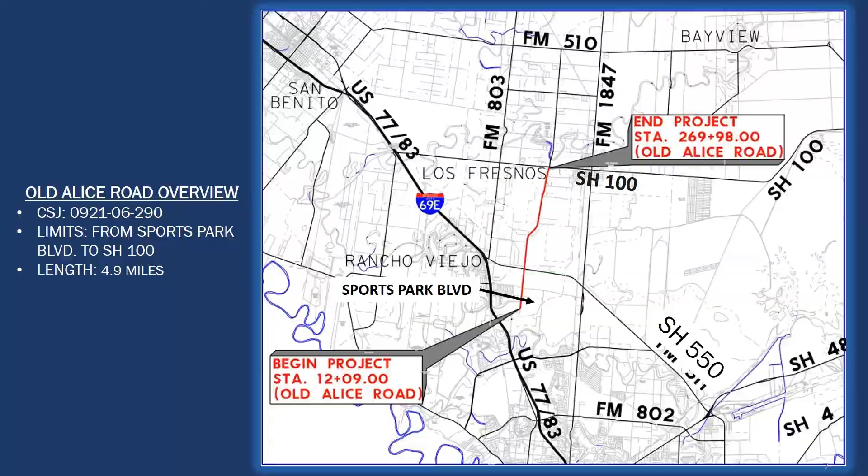The project is needed because Old Alice Road does not meet current TxDOT design standards. The existing roadway is at traffic capacity and is experiencing increased traffic congestion. Reduced mobility has decreased automobile and pedestrian safety and has inadequate drainage.

Traffic is expected to increase from 16,900 to 24,200 vehicles per day, a 43% increase. Portions of the road are impassable during rain events due to lack of pavement, causing a safety concern.

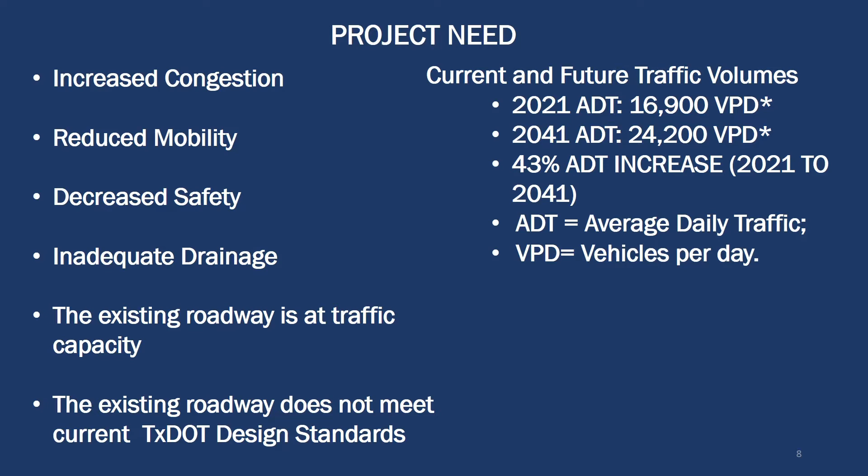The purpose of the proposed project is to meet the current TxDOT design standards, provide a roadway to meet the anticipated increase in traffic volumes, to reduce traffic congestion, to improve traffic and pedestrian mobility, to improve roadway drainage, and to improve community connectivity between Sports Park Boulevard and State Highway 100.

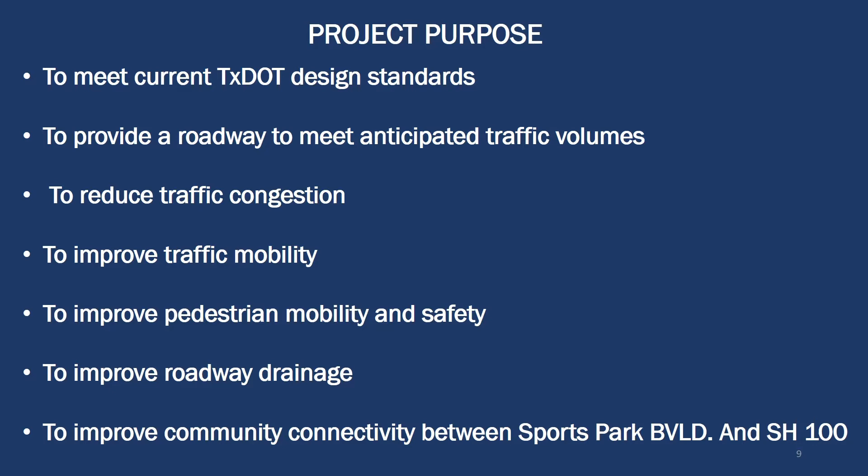As previously mentioned, Old Alice Road is a rural roadway consisting of a 2-lane roadway with no shoulders, and stormwater runoff is handled by parallel open graded ditches. The roadway also is not paved in some areas where the roadway is not striped to designate each travel lane, and during major rain events is unpassable.

The pictures presented depict the existing conditions of Old Alice Road. The first picture shows the existing roadway conditions from Sports Park Boulevard to State Highway 550. The roadway is a 2-lane asphalt paved roadway with no shoulders, and drainage is accomplished by open vegetated ditches that are parallel to Old Alice Road.

The second picture depicts the existing condition of Old Alice Road from State Highway 550 to 1.65 miles north of State Highway 550. The roadway is a gravel dirt roadway consisting of an unmarked roadway with no designated travel lanes. Open graded ditches, which are parallel to Old Alice Road, provide drainage for the roadway.

The third picture depicts the existing conditions of Old Alice Road from 1.65 miles north of State Highway 550 to State Highway 100. This section of roadway consists of a 2-lane narrow roadway with no shoulders, and drainage is provided by parallel open graded drainage ditches.

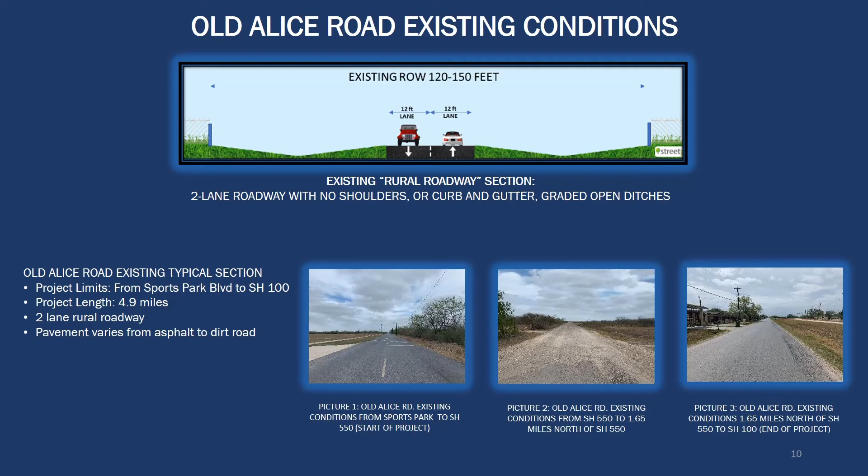The roadway will be reconstructed and widened to provide for an urban roadway typical section. This upgrade would consist of 4 12-foot wide travel lanes, a 16-foot wide center left turn lane, and 10-foot wide shoulders. The roadway would have curb and gutter stormwater system to accommodate stormwater. Additionally, sidewalks will be placed parallel to the road on both sides for pedestrians.

Since the existing right-of-way width varies from 120 feet to 150 feet throughout the project, no right-of-way acquisition will be required on this project.

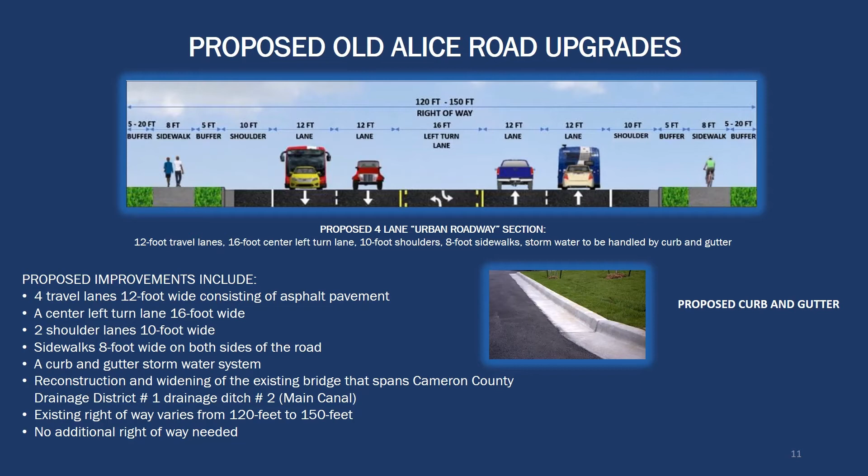For this presentation, the following slides will depict the roadway schematic in sections due to the length of the project roadway schematic. The schematic will also be posted on the virtual public meeting website so the public can view the schematic better and they can zoom into areas of interest.

This slide consists of the section from Sports Park Boulevard to Naranjo Road. As shown on the schematic at the beginning of the project, there is going to be a 540-foot transition from a 2-lane existing roadway to our proposed 4-lane section. The picture provided at the bottom illustrates the existing conditions of Old Alice Road, which shows a 2-lane road with no curb and gutter system. As previously mentioned, no right-of-way acquisition will be required.

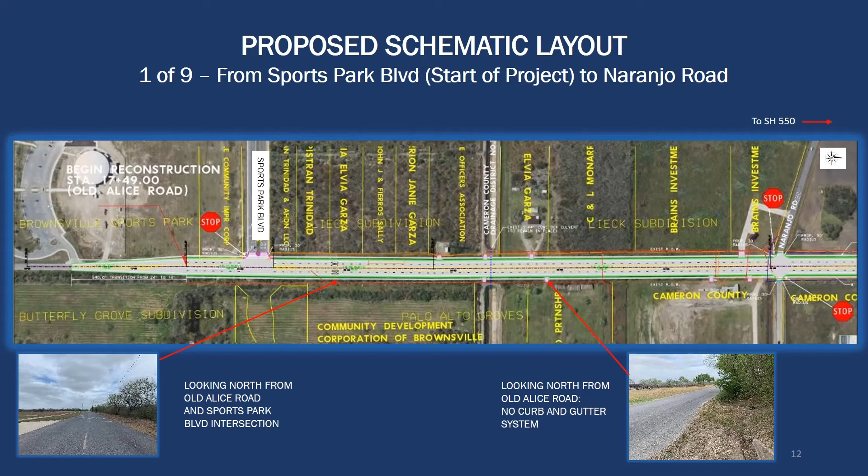The second section extends from Naranjo Road to State Highway 550. Pictures provided show existing conditions of the road underneath State Highway 550. The existing road below State Highway 550 has to be reconstructed in order to match the proposed typical section. The proposed improvements under State Highway 550 would not require any modifications to the existing overpass. A traffic signal is being proposed at the intersection of Old Alice and State Highway 550 frontage road.

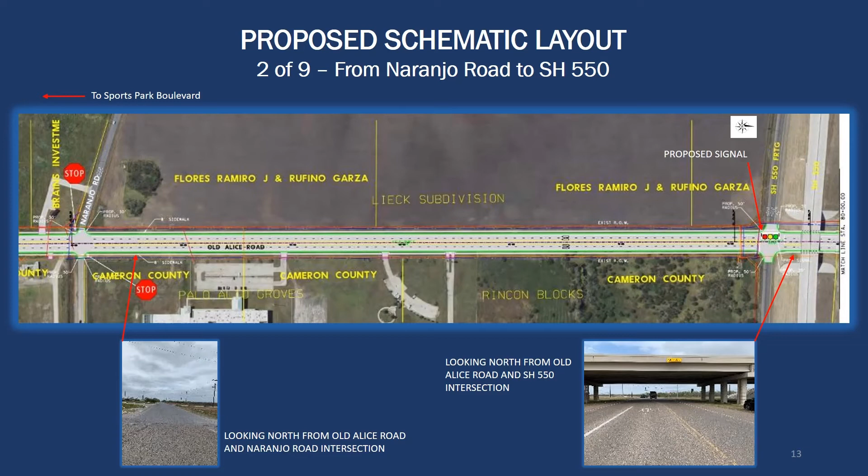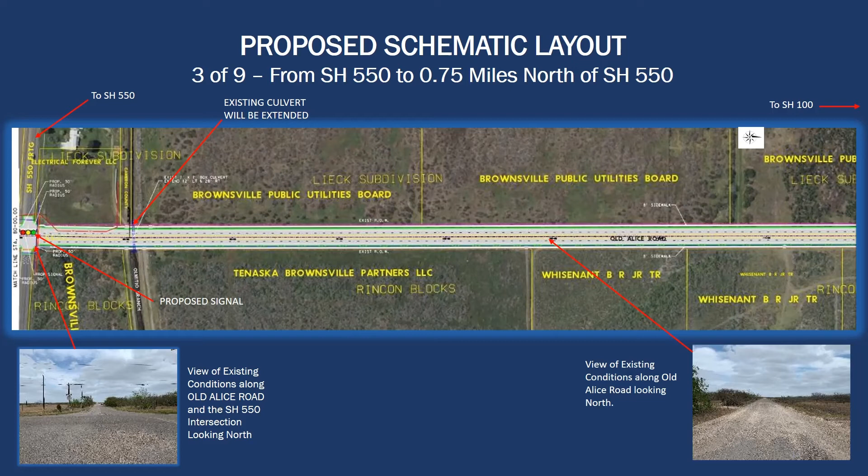The next schematic section is from 0.75 miles north of State Highway 550 to 1.25 miles north of State Highway 550, which has a major curve in the roadway. The road in this section also has no existing pavement, lacks signage, and has no pavement markings to guide drivers through the curve, which creates a hazard.

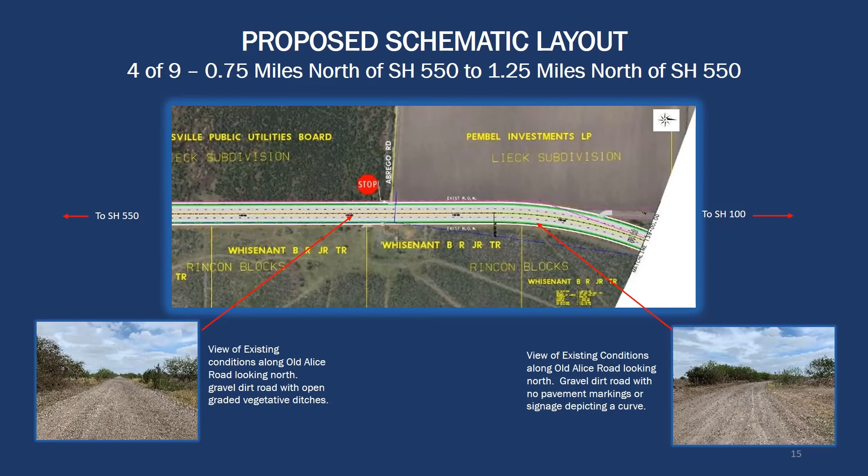The fifth section of the roadway schematic extends from 1.25 miles north of State Highway 550 to 1.65 miles north of State Highway 550, a distance of 0.4 miles. In order to maintain positive drainage, a new 138-foot-long culvert will be installed at the existing drainage ditch.

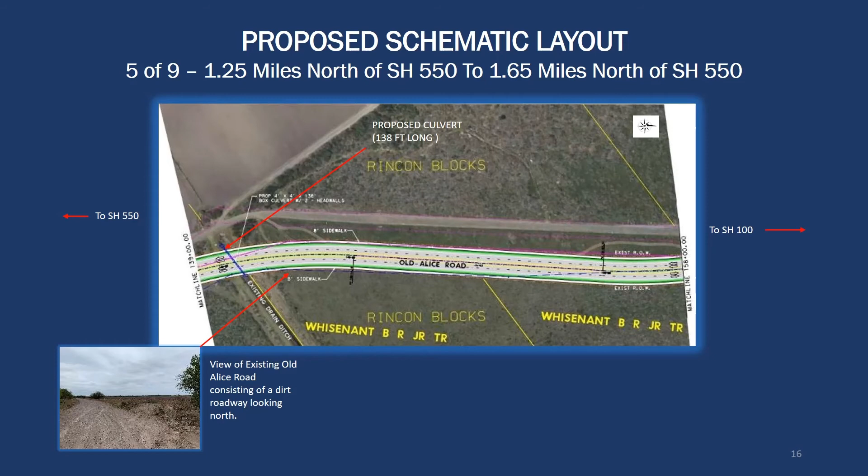The sixth roadway schematic section extends from 1.65 miles north of State Highway 550 to 2.32 miles north of State Highway 550. A portion of the improved roadway would run parallel to County Road 321 just north of the county roadway. As shown in the picture, the existing bridge width does not match the proposed roadway.

It will be removed and replaced with a new bridge to match the proposed roadway typical section. The bridge replacement is proposed to be constructed in phases so traffic flow is not interrupted. In order to provide access to Old Alice Road to County Road 321, an access road would be placed about 300 feet south of Lemon Drive.

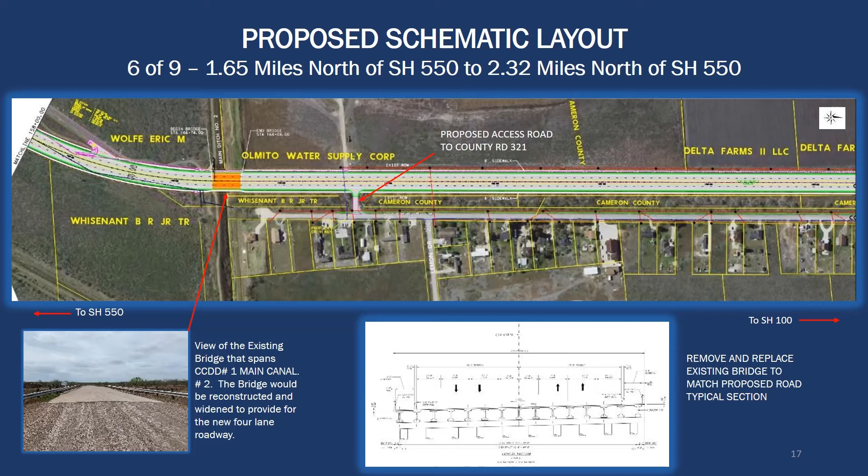The next schematic section extends from 2.32 miles north of State Highway 550 to 0.38 miles north of Papaya Drive. A new access road will be placed about 950 feet south of Papaya Drive to connect Old Alice Road to County Road 321. These access roads are crucial since both roads will no longer intersect with each other. This will be accomplished by removing a segment of County Road 321 as shown on the schematic. A cul-de-sac will be constructed to allow drivers to safely turn around.

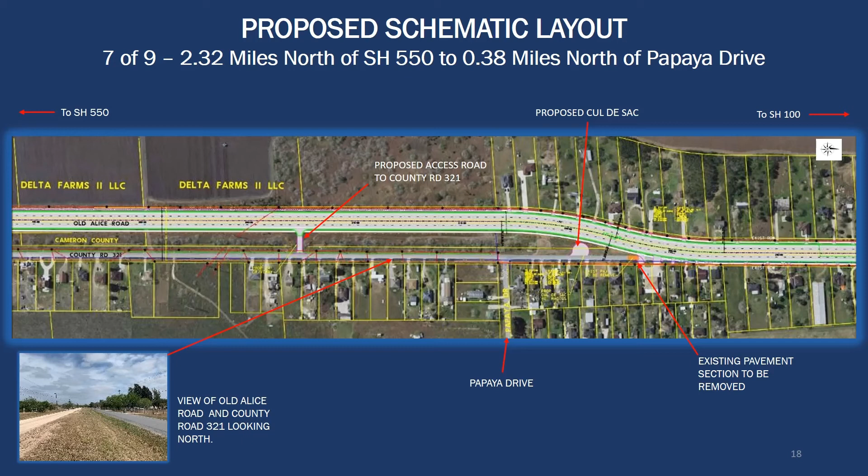The next section of the schematic extends from 0.38 miles north of Papaya Drive to 0.28 miles north of Joya Street. The photograph on this slide depicts the existing conditions of Old Alice Road after County Road 321. Two existing drainage culverts shown in the segment will be extended to accommodate the new roadway typical section of 4 lanes, a center turn lane, and shoulders along with sidewalks on both sides of the roadway.

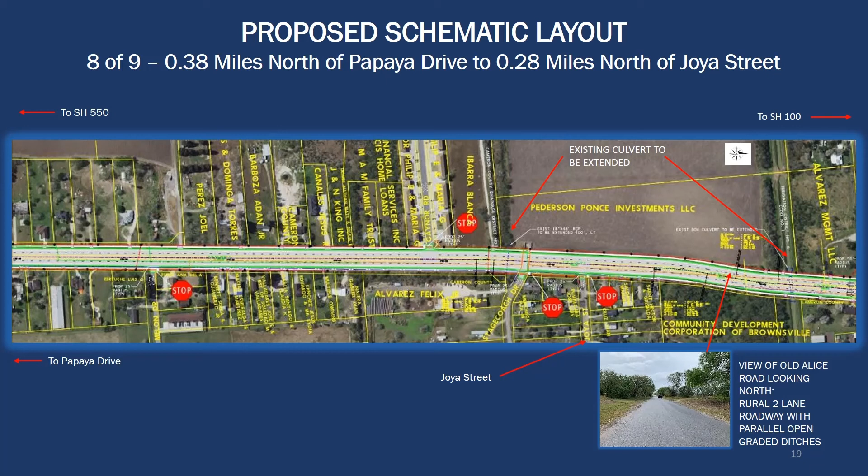The final section of the schematic is from Joya Street to State Highway 100. The photograph on this slide depicts the existing Old Alice Road and State Highway 100 intersection. The existing signal will be modified to accommodate the new roadway width. The existing drainage structure would be extended due to the additional travel lanes, and the irrigation canal structure would also be extended.

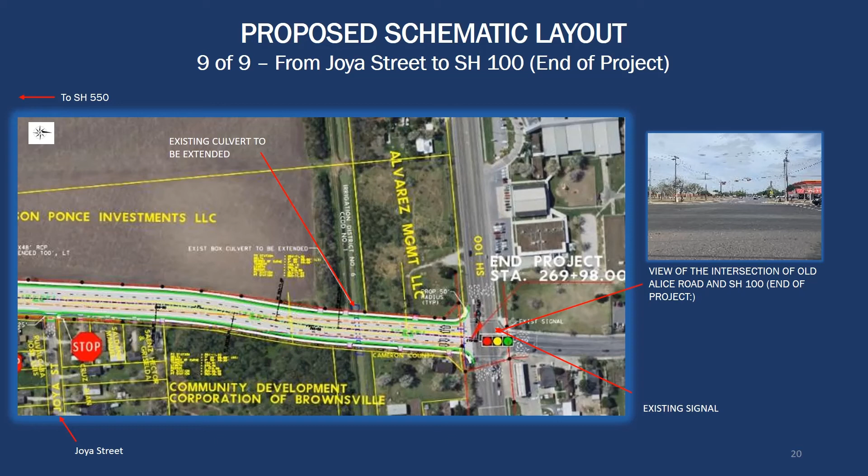An environmental analysis on the proposed project improvements is currently ongoing. This virtual public meeting is one important aspect of the environmental analysis process. In addition to the public meeting, an analysis on the project area's environment is being conducted.

This includes an analysis on federally and state-listed endangered species that could occur within the project study area, air quality analysis, a hazardous materials analysis, historical studies, archaeological studies, a noise analysis, a water quality analysis that includes waters of the U.S., including wetlands, and indirect impacts on the area due to the proposed improvements.

It is anticipated that the proposed project would have minimal impacts to the environment and the project would be approved by TxDOT as a categorical exclusion.

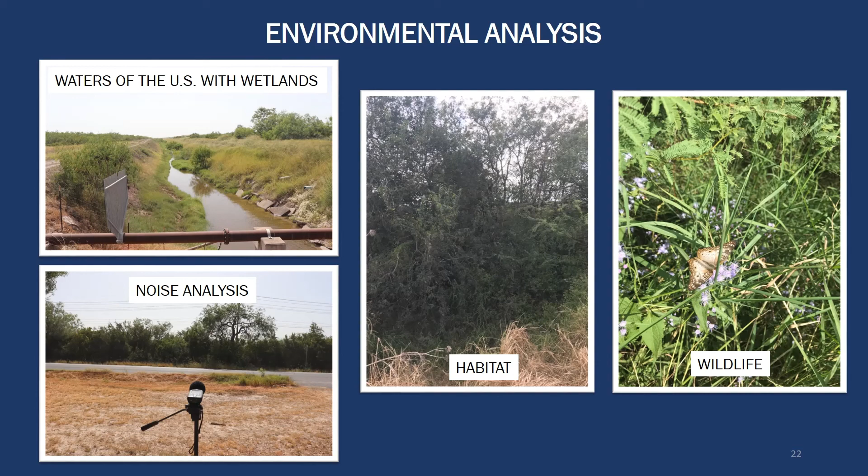As part of the National Environmental Policy Act, NEPA process, we are holding this virtual meeting to gather public input with respect to the project. Information collected will be analyzed to further understand the project needs.

This project planning process has been estimated to be completed in spring 2021. It will be followed by project design and construction bidding. The construction of the project is projected to take 12 months, with the roadway to be fully operational in January 2023. At this early stage, it is estimated that the construction cost is $18.1 million.